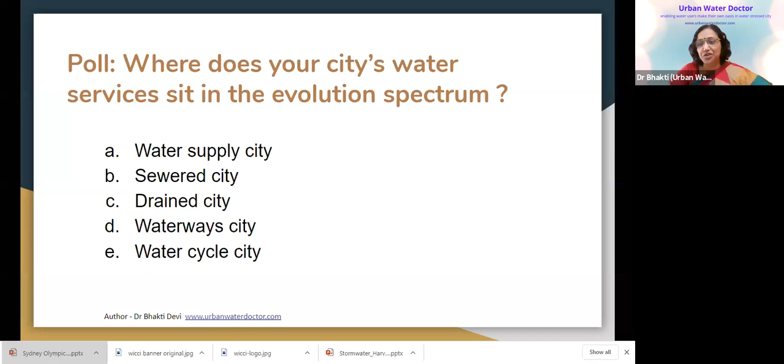Okay, so most of them don't have a sewage system with enough coverage. So water supply city, sewered city, great. So our aim is to get to a water sensitive city. That is our aim, and integrated urban water management can show us a different kind of way, which is more interesting than the traditional way we have been doing things. So that's why I want you to get the courage, don't lose heart, that we can easily go from water supply city to water sensitive city straight away. That's the beauty of integrated urban water management.

Okay, so now, as I said, we want to really understand why we need to integrate. And we'll do that by taking stock of the outcome of unintegrated urban water management. So of course, I want to take the example of our own cities in India. We will look at some facts and figures in order to understand the outcome. So before I share one of the figures, can you guess,

Is there a poll ready, Dipankar? Have you got a poll for this question? Dipankar, are you there? Yes, madam, it is ready. You have a poll for this? Yeah, maybe put it out.

So I'm asking you to guess what percentage of our country's population is currently under extremely high to high water stress. Water stress in simple terms means your water demand is much higher than the water you have available. So there's a big imbalance between what you need and what you have. So please, just guess an answer, and then I'll reveal the answer. You will remember better when you have guessed it and got it right or wrong.

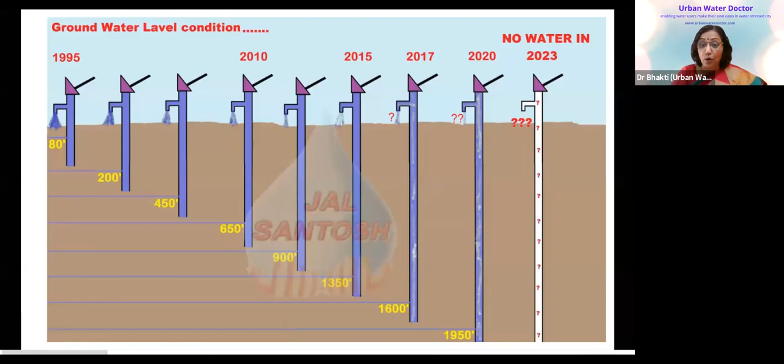So this is the situation of groundwater. Groundwater is getting emptied because we are only taking water out and not putting anything in. Okay, then the next thing, now let us look at what is happening with the sewerage system.

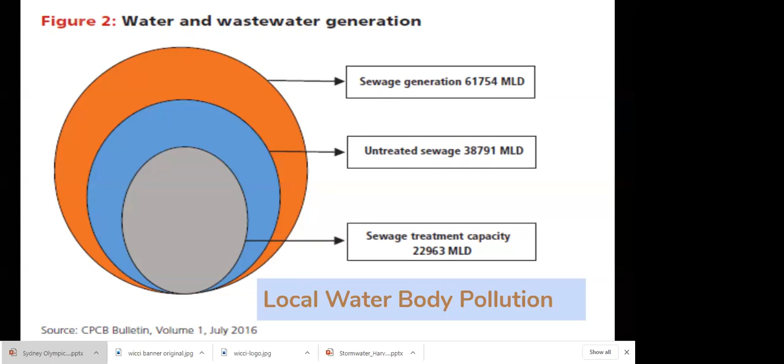As many of you yourselves can hear, this is very disturbing actually. I don't know why, even with the mute, it is making noise.

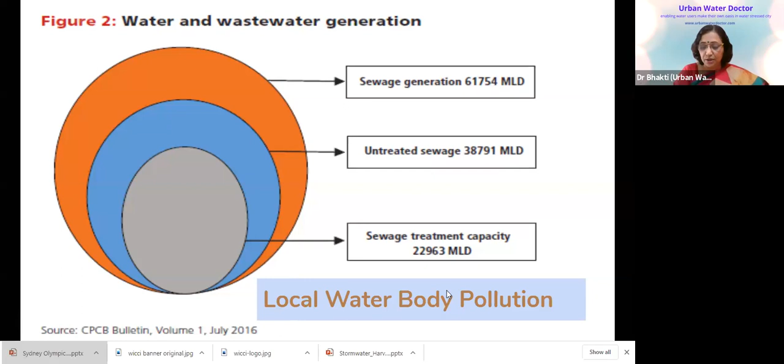Okay, so the sewage system, we find that a lot of the capacity required for treatment is much higher than what we actually have. And when you have less capacity to treat sewage, that results in local water body pollution because you're going to discharge untreated sewage into the local water body. This is what happened in Bangalore, that the lakes have become a dumping ground for untreated sewage as well as solid waste.

So everything is stacked up, and that is what is making the water crisis. We are continuously drawing water in a linear way and finishing it. It's like drawing money from the bank over 100 years and it's emptied now, while the population has grown, and on top of that, whatever water you have is also polluted.

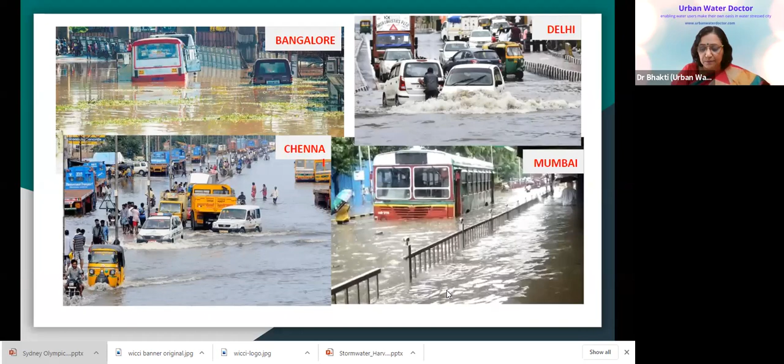And of course, more and more city means more and more hard surfaces, so you are bound to get all the storm water in the form of floods. And this is what you see in every city. It's a normal and common situation. So what I'm showing you is the outcome, the result of how we have planned and built so far.

So what does it tell? That all the water that we are throwing away, they count it as utilizable water. That means you can easily decontaminate and use it as water. It may not be fresh water, but it is still utilizable because we now have technology to treat the water to our required quality.

Because we have not been doing that, we have been extracting, using and dumping, extracting, using and dumping. What that does is it finishes off the water resource and increases the polluted water. So that is the result.

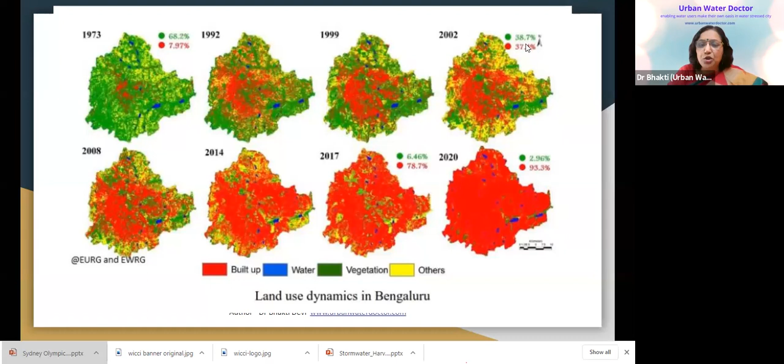Now, how does that connect with water? What does that have to do with water? Just put it in your chat box. Why am I showing the tree cover statistics when we're talking about water? Is there a relation between trees and water? And if so, what is that relationship?

Yeah, some of you have said erosion, water holding capacity. Yes. So basically, trees are like the lungs or the lifelines, which actually allow the water to seep into the ground and recharge the ground. But as the city gets built and built, the chances become less, and the trees are your only chance through which the water can seep into the ground, and even that has been killed off.

Then there were a lot of lakes, 1,000 lakes were there in Bangalore. I'm using Bangalore as an example only because Bangalore is right now in front of the queue where the water has died. And every city is in the queue. The story is going to repeat in every single city around the world, by the way. Every city in the world is on the exact same system, which is not at all sustainable. Bangalore and Chennai happen to be in front of the queue, and let us learn from Bangalore. That is why I'm showing the Bangalore example.

So trees have been killed. Lakes used to be the place where the water was getting stored and recharged. The lakes would also act as a recharge for the groundwater. Lakes have been built over, big stadiums have been built, depots have been built, IT parks have been built over them. So it is all sealed. So basically we have sealed the ground for so-called development, whereas we have sealed our own future at the same time. Because without water, there can't be any future, whether it's business or living.

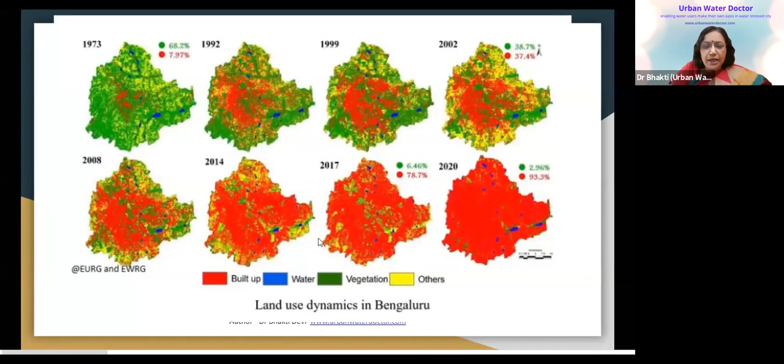But what did we do? Not only did we draw the water continuously without putting anything back, on top of that, the catchment through which water actually gets recharged by nature has been deforested. So from everywhere, it is like we are committing suicide, knowingly or unknowingly, doesn't matter. It is a complete suicide. You've sealed the cities, you've sealed the catchment by taking out the trees. You have no hope left for any water from anywhere.

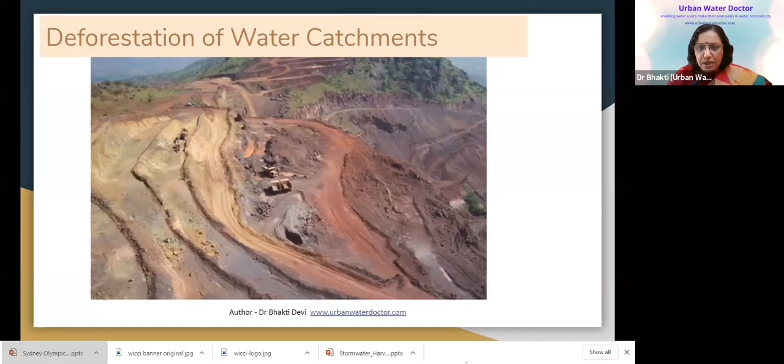So basically these are the outcomes. This is all about the various outcomes that you can see. Then there are some outcomes in terms of how we currently use water, whether it is industries, domestic use, offices or commercial properties. Let us try and see what the current situation is with how we are using water. So I have a quiz here. Dipankar, if the quiz is ready, you can put it out.

So I would like you to answer that industries in our country, and these are not my figures, this is what I've taken from the Ministry of Environment, which has published this, National Water Mission. So industries in our country use what times more water per unit of production compared to other countries? So where do you think we sit, compared to other countries, in terms of our water use in industries? Take a guess and see what your answer is.

I would like to see what you think it is, and then I will share what the correct answer is. So again, you don't need much time, another 10 seconds and we can close the poll. So all of you please pick one answer and reply. So we're talking about water use within industries. How smart or how unsmart is it, how much are we using compared to other things?

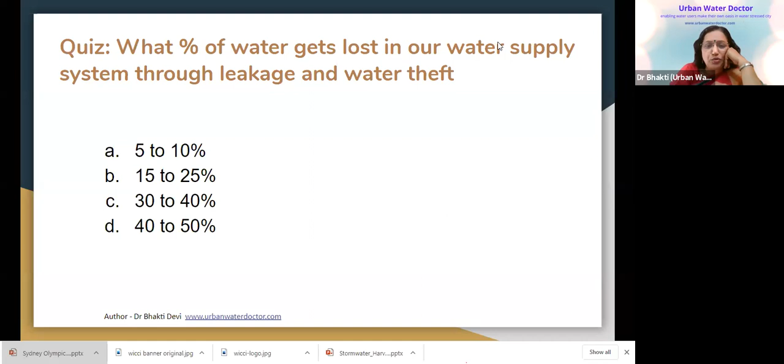So again, just pick an answer and all the answers will be revealed together. Because we are talking about how we tend to lose or waste water. Water we already have also needs to be conserved and saved because we are not having enough water. So it is important to understand how much we are wasting so that we know how much can be saved. Okay, what's the answer? 15 to 25 is what most people have replied. Okay, we'll see.

Next, last question. Now I'm talking about our own household or within offices. What is the water saving potential? That means how much percentage of water can we save by making simple, low cost hardware changes and no cost behavior changes, because the current water use seems to be such that there is potential to improve our usage. That means we can use less and save more. So what percentage could be the saving potential inside the home and offices?

And remember all your answers so that when I reveal, you will see whether it is different or correct. Okay, we can close the poll. Again, many of you think it's 15 to 20. 32% feel it's 30 to 40. Okay, I'll reveal all the answers in one slide, because that's the facts. I got the figures from the National Water Mission.

Industrial plants in our country consume 2 to 3.5 times more water per unit of production. 2 to 3.5 times more. So what does that say? We have so much potential to save water and make our water use efficient in the industrial sector. So before you even start to get more water from the ground and another dam to be built, let us focus on taking back this water which is already there.

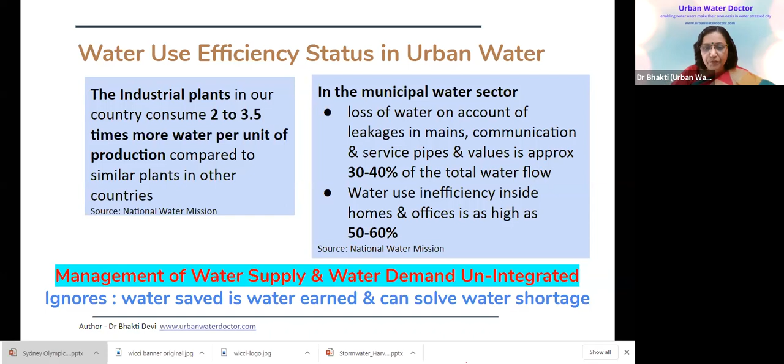So the current water system is what I call an extract, use, dump system. Just replace water with money. What do you think will happen? You'll become bankrupt. So we have become water-rupt. Our water bank has become bankrupt. And why? Because the population is continuously rising. It is not static. Even if the population was static, you need to have your catchments in good condition so water is getting recharged. But you're not paying attention to the catchment. So without recharging the natural system, you are continuously extracting, using and dumping that polluted water.

And then what happens? Until the water source is depleted, and water conflict or water war happens, because cities around the same water are growing, they're accessing the same water, now they don't have enough water and they start fights. And the reason is because the management of water, sewage and storm water is unintegrated.

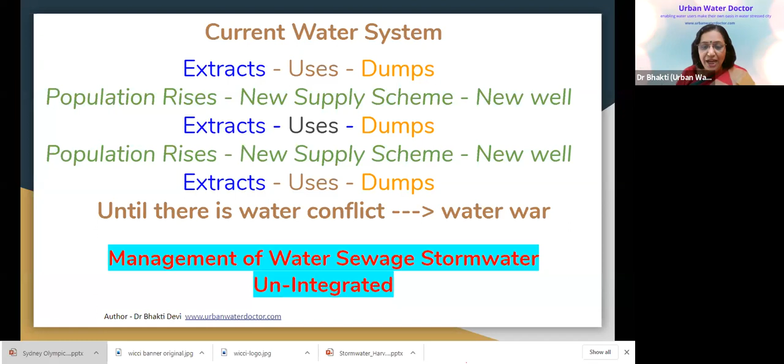If you were to quantify the rain that falls on a city, you'll find that it has enough water to supply. But we don't look at rainwater as a source. We look at it as something to be thrown away because it floods. Of course, there's a good reason for that, but we can also think about how we can look at it as a resource, and that is what integration means.

Same as we saw, tree cover and forest cover are lifelines for the water aquifers and rivers, yet we continue to mindlessly destroy them to make room for development, killing every chance of replenishing water. So not only are we ourselves not doing anything, we are not even giving nature a chance to replenish by removing the trees and forest cover. So why do we do that? Because catchment management and water management are not looked at together. Water management is a different department, forest a different department. They don't see the natural connection. Nature is interconnected, but we operate in silos, and that is the problem.

Now I've come to a point where I want to ask you. You've seen the types of things that have led to the water crisis. So my question is, Dipankar, if the poll is ready, please put it there. What would you consider the number one cause of the urban water crisis? I'm giving you four factors. Every factor contributes, of course. Which would you rate as the biggest cause of the urban water crisis?

And another way to look at it is, the cause that is controllable, that you can control, it is in your hands, because you are a water user or you are a water planner, anyone. And that's another thing. Water management is not just a job of the water company or water utility. There you go. Many of you do think it is.

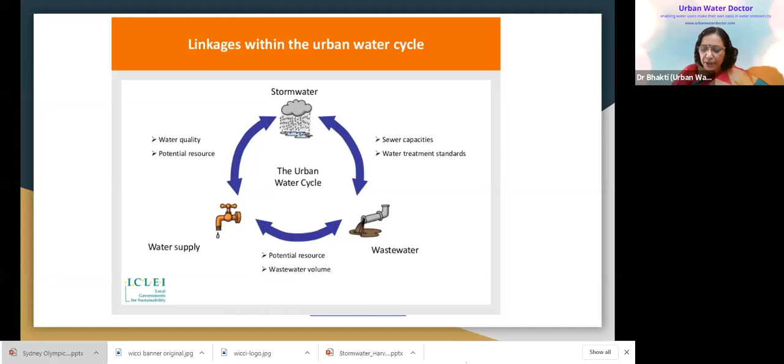And this is another way to look at it, because as I told, the whole idea of integration is looking at the water supply objective, the wastewater objective, stormwater as interconnected. It's all linked together. And how do you link them? If you look at it as a resource, then you will be able to integrate them. Integration of urban water management is also about integrating with other sectors in urban areas. For example, water cannot be moved without energy. It is closely linked with energy consumption. The more water you use, the more energy you're using.

Did you know Bangalore city brings water from a distance of about 150 kilometers, and on top of that, Bangalore is located on a height? It's like a hill station. So the Kaveri water has to be pumped up by almost 1 kilometer height and 150 kilometer distance. Imagine the energy it uses to move that much water. About 1200 million liters per day is moved every day. Out of that, 50% is lost in the system.

Now, can you take a guess? BWSSB is the Water Supply Board of Bangalore. What percentage of their total expense must be their electricity bill? Just put it on the chat. I should have put it on the poll, but just put it on the chat. What's your guess? What percentage of their expenses is made up of just paying the electricity bill to BESCOM? BESCOM is the energy provider.

Okay, let me see some answers. Okay, you got 30%, 40, 60, 70 to 80. I think that is the correct answer. 70 to 80% is simply electricity bill. So can you see how closely it is connected?

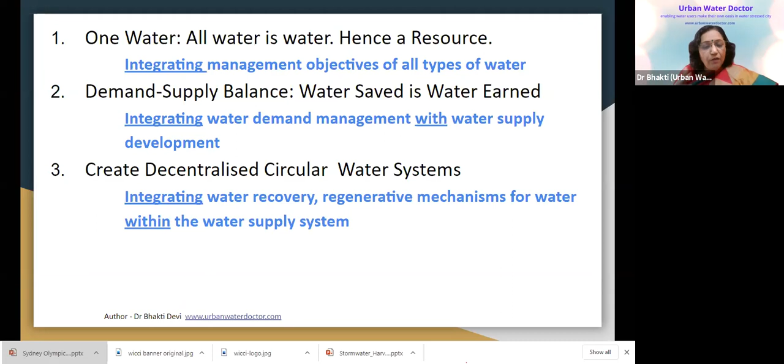The water supply system has to incorporate water recovery, simply because for 80% of our demand we need different qualities of water. We don't need one quality of water to be supplied. We can make non-potable quality water for things that are not for drinking.

Then the other thing is we have to integrate any urban forms, whether it's roads, whether it's buildings, any hard surfaces that we build in a city, so that we become water sensitive about it. We understand how it impacts the water cycle, and therefore how can I create a design in the building that will generate less, will retain the stormwater rather than throw it out, and will recycle it so it doesn't go out. So you have to become water sensitive, and that happens by integrating all three principles within the urban design and within the city infrastructure.

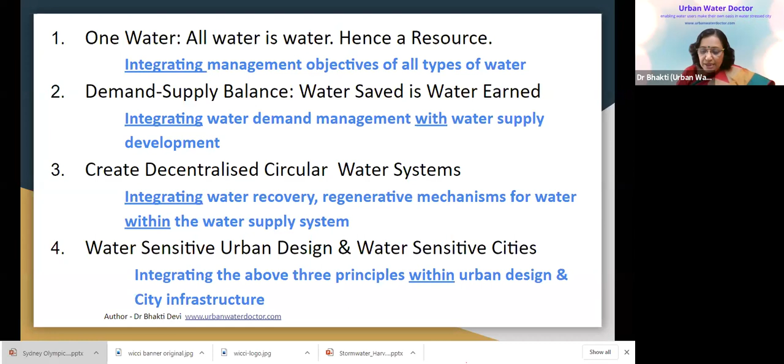So whether it's a road you're building, whether it's a dam, whatever you build in the urban system, you have to make sure you are following the three principles: water demand and supply balance, and create a decentralized circular water system. So again, these are abstract concepts. So what does it look like if we did it in reality?

So that is why I want to take the examples in Australia, where I have been personally involved in each of the projects, so I have picked those projects. It starts with my own journey in Australia with my water career. So I'm going to show 4 of them. Each of them highlights one of the principles, and it will have certain aspects of all the other principles. So the first one I want to talk about is the Sydney Olympic Park, and it has a system called the Water Reclamation and Management Scheme.

So I'll give you the 4 things. And before I start each case study, please listen to it carefully, because it's almost like a quiz. After each case study, there'll be 2-3 questions asked as a quiz or as a poll. So you'll know whether you were listening to the presentation carefully. So please pay attention to the presentation on the case study.

I just want to check the time. How are we going? Oh, it's almost half an hour left now. Correct, it's half an hour left, no?

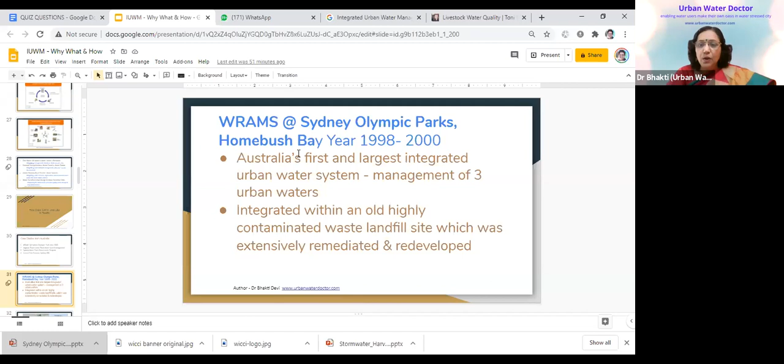Okay, so we start with the Olympic Park presentation. Sydney hosted the Olympics in 2000. And they did a very smart thing, because they knew they had to build a lot of infrastructure for the sporting stadiums, as anyone would when you host an Olympics. So they did two smart things. One is they picked the most contaminated land in Sydney, because Sydney has a history of British colonies using some of the places. This particular site was very contaminated, because it used to have the state abattoir.

They were making meat for many years in that place, and an abattoir produces a lot of toxic contaminants across the entire land. On top of that, it was being treated as a waste dump for a long time until 1990. So they had stopped using it as a landfill, but it had become completely polluted. So they thought, let us use this opportunity to completely change and clean up this site. And that's what they did.

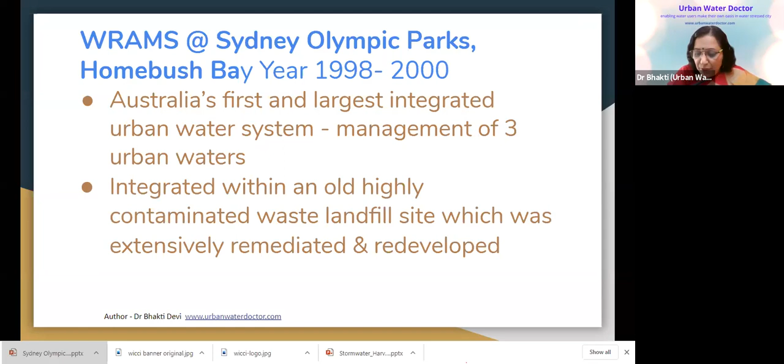So what's the context? There was a 640 hectare site. They decided they will build all the required stadiums and parks for all the Olympic activities, which after the Olympics can be used for multiple purposes: holding events, entertainment centers, offices. So they designed it in a way that after the Olympics is over, those very stadiums can also be used for other purposes. So it has a 640 hectare site.

Two thirds of that area was turned into beautiful parklands. Then major sports and stadium facilities, residential complexes and commercial office spaces were built, and whatever was required for the Olympics was done, and they also made enough infrastructure for the future. So this is the context, and in that we have the system called WRAMS, or Water Reclamation and Management Scheme, which I'll talk about.

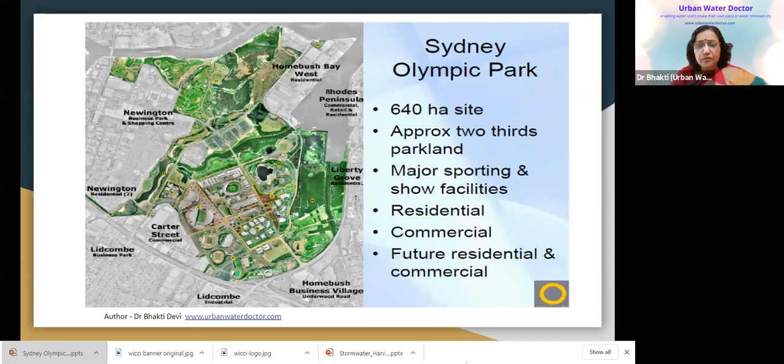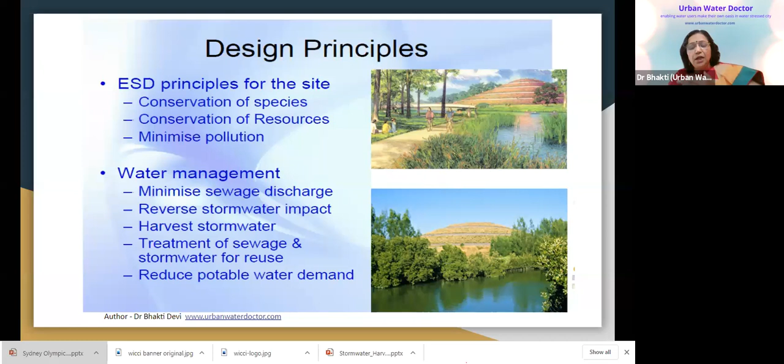So the design principle was, because it was integrated urban water management, whatever we build must minimize sewage discharge, must reverse the stormwater impact, must harvest stormwater, treat it, reduce potable water demand, and reduce the need for using fresh water. Okay, so that was the principle.

This diagram is not very clear, but I want you to focus on the fact that for all the facilities, number one is the brown color. All the sewage generated from the facilities is treated in a water reclamation plant, and whatever is produced there is diverted to the water treatment plant. Then the stormwater from all the facilities is diverted to a stormwater treatment pond, and then stored in a brick pit.

It was also a site where they used to have a brick making facility, and there was a big brick pit there, so they used it to store the treated stormwater. Then the treated sewage and treated stormwater are treated in the water treatment plant to produce all the recycled water, number 5, needed for the facilities and future facilities. So this is, in short, the entire WRAMS system.

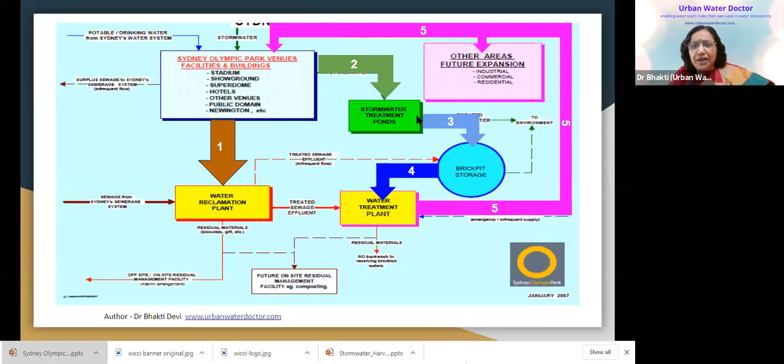So sewage is being treated and reused, and stormwater is being treated and reused. They have a water reclamation STP, made up of a sequential batch reactor, with biological nutrient removal and disinfection. Then for the stormwater, they use the brick pit for storage, and then there's treatment with wetlands. That is the stormwater part.

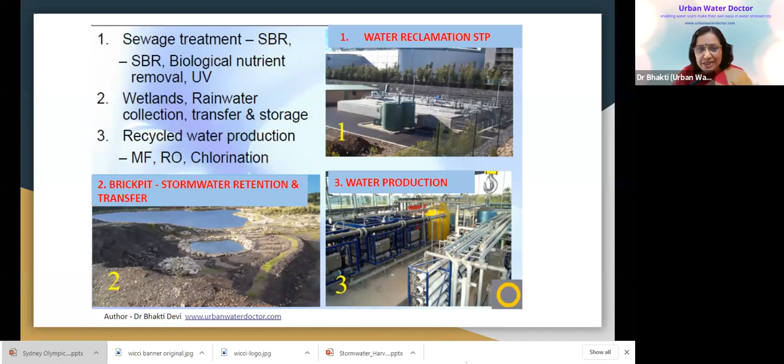And number 3 is the recycled water production, where they do advanced treatment using microfiltration, reverse osmosis, and chlorination. So these are the facilities, and this is how it looks. They made it in glass so that people can come and look at it, because it was also for demonstration purposes. So they turned it into a beautiful space for people to visit the plant.

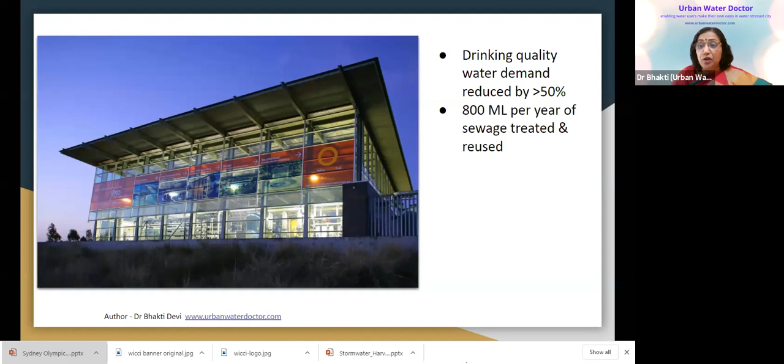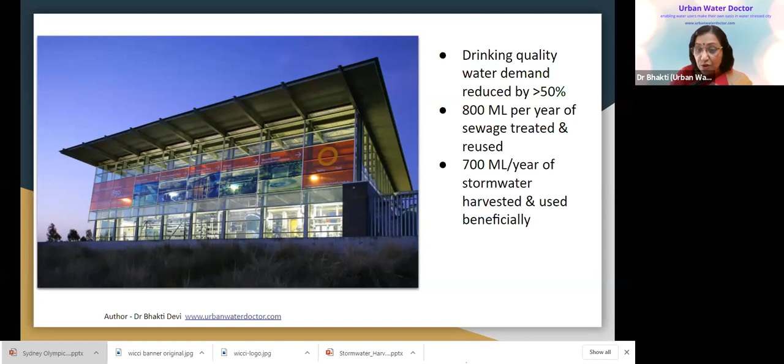So what does it achieve? Drinking quality water demand has reduced by more than 50%, so a very small percentage of demand requires drinking quality water. 800 million liters per year of sewage is treated and reused. 700 million liters of stormwater is harvested and used beneficially. They created a lot of wetlands out of the treated stormwater, which attracted a lot of biodiversity, so it has become a beautiful biodiverse area.

And 850 million liters of recycled water is supplied every year to 15,000, now probably 20,000, customers. So that is the population this system is servicing. As you can see, it's a small system. This is called a decentralized system.

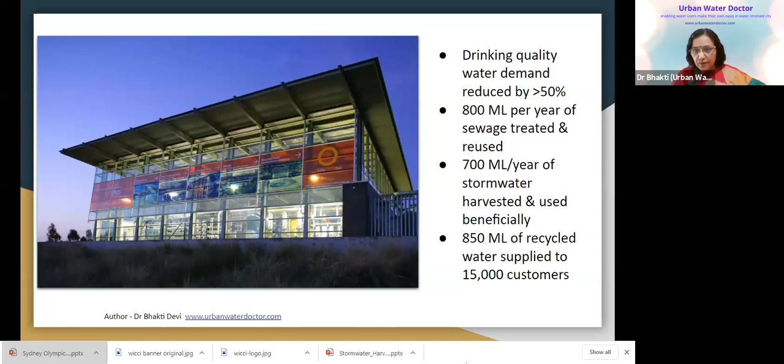So what kind of water are they using the recycled water for? Toilet flushing, car washing, any wash downs, irrigation of parks, residential gardens, playing fields, clothes washing, even washing machines. It has a separate pipe supplying you the non-drinking water, but clean enough to not soil your clothes. Firefighting, fountains, cooling towers in the offices, construction purposes, because new buildings will be coming up, so they're using it

for that. Swimming pool filters, backwashing, so these are the variety of uses. Normally, in the traditional way, we would be supplying drinking quality water for all of that, but when you start looking at sewage and stormwater as a resource, you can start to supply this.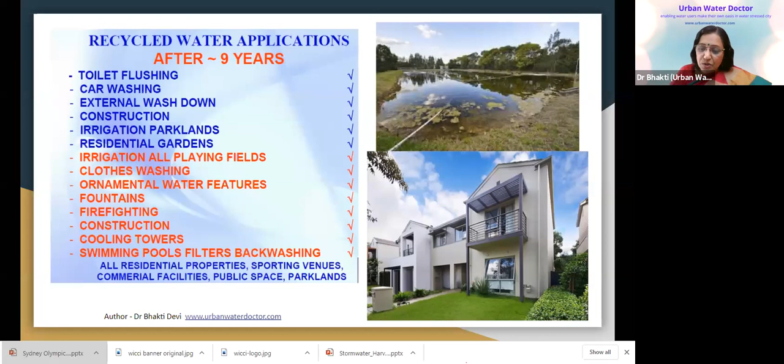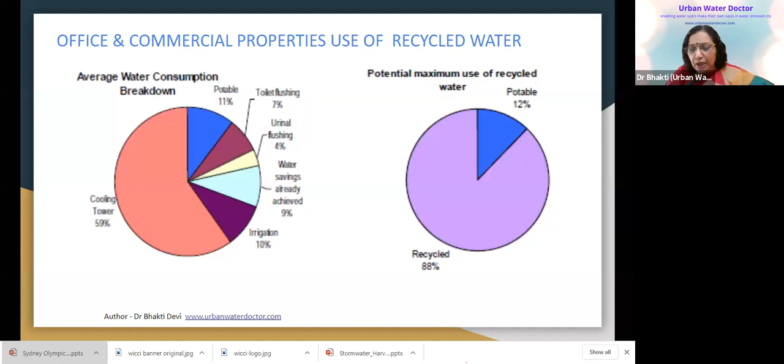So just to give an example, in a typical office building, almost 88% of the entire demand for irrigation, cooling tower, all this would be replaced by recycled water. So you only need 12% of water required for drinking quality. So that is the impact you can see this system has made.

Then I wanted to give an example of a multifunctional infrastructure. So for example, this brick pit, I told you, stores the treated stormwater before it is pumped to the treatment plant. And of course, it always has more water than is needed every day. So that was used to also enhance the population of the green and golden bell frogs, an endangered population.

So they used it for biodiversity purposes, and then they created this deck so people can walk around it without disturbing the biodiversity. So they made a beautiful walkway on top of the brick pit.

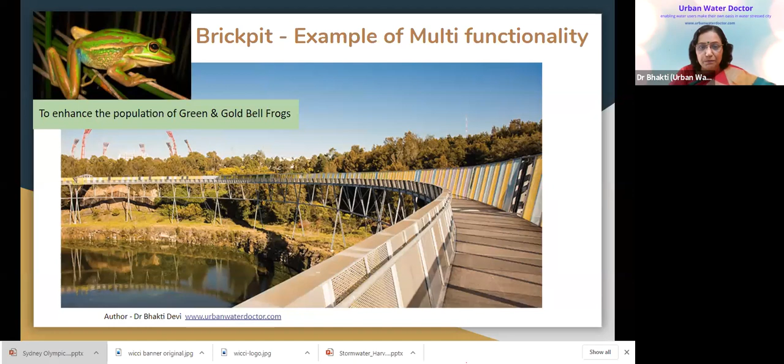So what I'm saying is that with any infrastructure, it has to be thought about how you can use it for environmental purposes, for social purposes, for the purpose of water creation, but excess water can be used for environmental purposes. So that is also okay. So that is a very good example of a multifunctional infrastructure. It's become a beautiful recreation spot now for people to come and enjoy the biodiversity.

Okay, now quiz time for the Sydney Olympic Park water reclamation systems case study I presented. So the first question, Dipankar, would you like to put the question? Okay, so what's the approximate size of the development? I think we don't need a long time. We just close the poll quickly so that we can move ahead. Okay, so let's see. Yes, good. So 61% of people are paying attention to that number. So 600 is the correct answer, 640 hectares to be precise. It's just for fun.

Then the next question, 1 minute. What percentage of total development area is allocated to parklands? Is it 1/3, 1/4, 1/2, or 2/3? Okay, so again, 2/3 is actually the correct answer. Some of you got it right. 1/3 of people got the 2/3 answer right. So that's fine. Okay, so one more question. I think there may be two more questions. Yeah, two more questions to go on this case study.

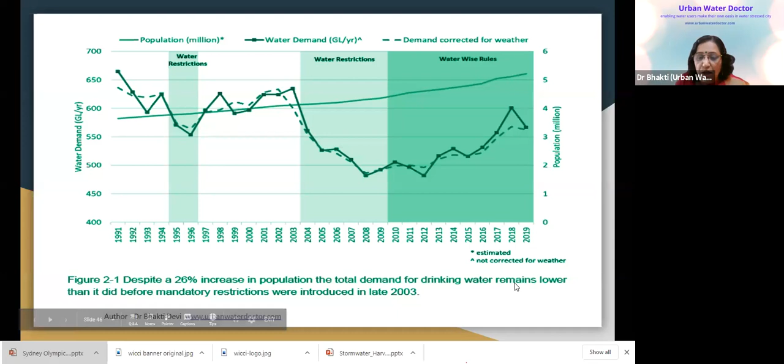Okay, so now I just wanted to show that they did two things. Fixing leaks: they almost save 44 billion liters a year going forward. This is the projection that they are continuing to invest in leakage management, and they'll save this much a year. So even if the population increases, the water demand is kept under control.

And they made a profit of $450 million in spite of spending nearly $60 to $90 million every year. And going forward, they are making a $1 billion investment over 10 years. That means 100 million per year investment to manage the leakage, and also to help people save water in their houses.

So what is the program they have? They announced this, called the WaterFix program. They say, call us on this number, we will come and fix your leaks for free. We will change your shower head for free. We will change your taps for free, and we will repair the toilet leaks.

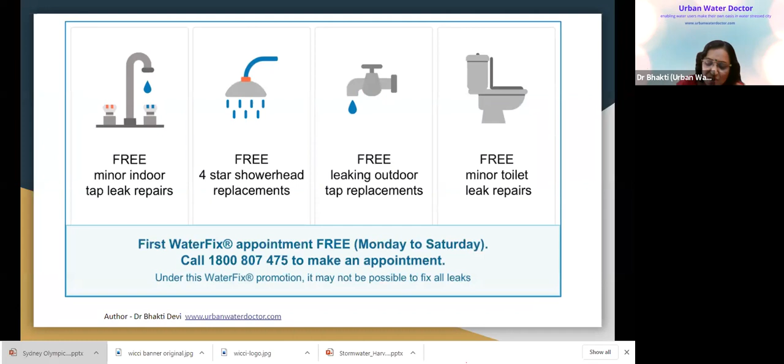Because they know that they're going to make money by helping customers save water. So this WaterFix program is very popular. It is advertised heavily so that there's no excuse for householders to not take this help.

And then they published best practice guidelines for water conservation in hotels and water conservation in offices, and they're all available in the public domain. So if you are in an office building, go and pick up this guideline, because these guidelines tell you what you can do on your own. You don't need anyone's help. They're all low-cost solutions.

Before you even start building rainwater harvesting, you have to first do this, because this is going to save you more water than rainwater can. Save this, then add rainwater harvesting on top of that. Add grey water recycling on top of that. And that way you build your water bank. And then suddenly you'll find, I don't need any water from the outside. I'm doing fine.

So in fact, in Bangalore, the model that I've developed, called the water scorecard model, helps the buildings reduce 50 to 100% of the water that they are importing or using unsustainably. But out of the 50 to 100% saving, 50% is inside the house, small changes. Only later on will you get more savings.

If you're not doing the household savings, you'll get 10% saving by doing rainwater harvesting. But that is not enough. You have to do inside saving. Inside actions are very important. So the next quiz is about this, if you're paying attention. So Dipankar, can we have the next two questions?

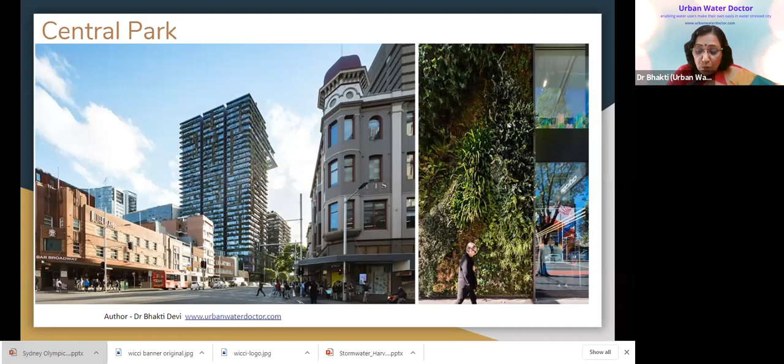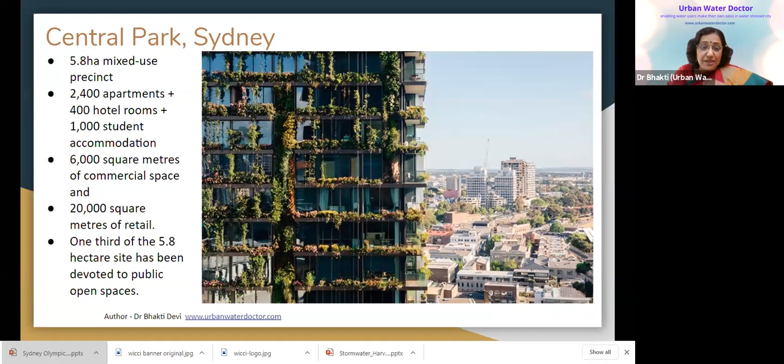So Central Park is about a 6 hectare mixed use precinct. Precinct means like a neighborhood or a layout. 2,400 apartments, so you can take about 3 people in every apartment. So that's around 7,200, 8,000 to 10,000. But of course, there's also floating population: 400 hotel rooms, 1,000 student accommodations because there's a university nearby, 6,000 square meters of commercial space, 20,000 square meters of retail space. 1/3 of that space is allocated to open public green space. So this is how the green spaces are accommodated around the building.

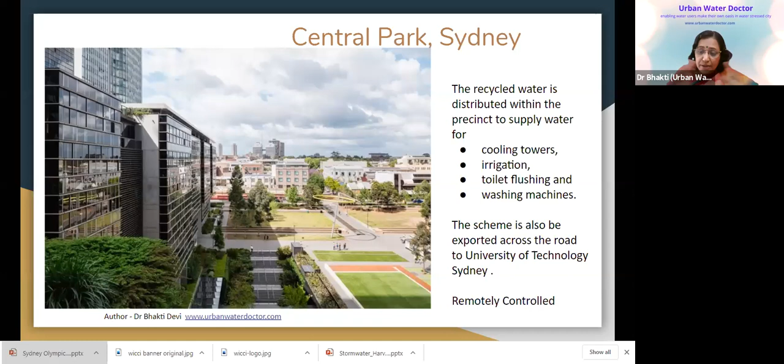Then the recycled water, since we're talking about water in this place, is distributed within the precinct to supply cooling towers, similar to Sydney Olympic Park. So wherever they could, they've replaced it with recycled water: irrigation, toilet flushing, and washing machines. The scheme is also exported across the road to the university, so even the university makes use of it in their cooling towers and toilet flushing. They have surplus water. The entire plant is remotely controlled. It's a compact plant in the basement. It produces no noise, no odor. So this is what it looks like at night time.

So wastewater is collected from the buildings. And also there is a practice in Australia called sewer mining. Sewer mining means, because the sewage system already runs in that area since it's an existing city, they take sewage from it, treat it, and turn it into usable water. Because sometimes when you have a recycling system, you can have less water being generated because you're efficient, but you need a bit more water. So they're taking water from the sewage system, mining it. They're calling it sewer mining, and that makes up the shortage in the volume. And they treat it and use it.

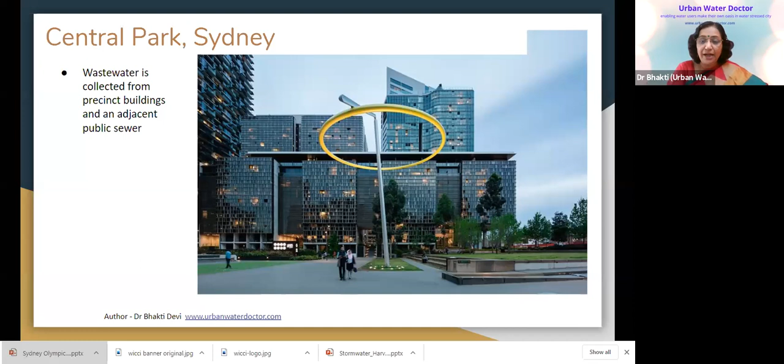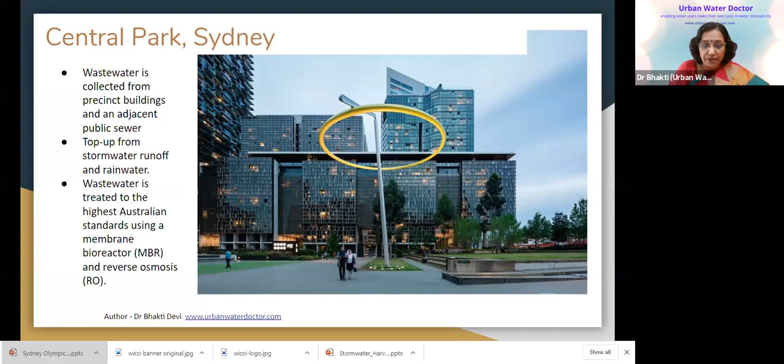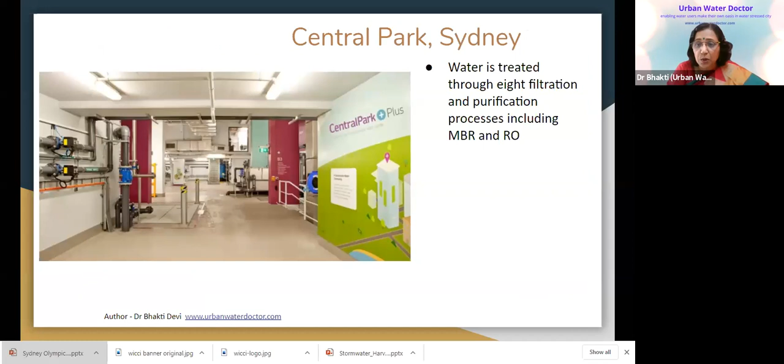Top up from stormwater runoff and rainwater. And wastewater is treated to the highest quality using membrane bioreactor and RO. This is how the plant looks in the basement, clean. Its water is treated through 8 filtration and purification processes, including MBR and RO. And it requires minimal space, doesn't generate noise, no smell, and it's easy to accommodate in a high density building.

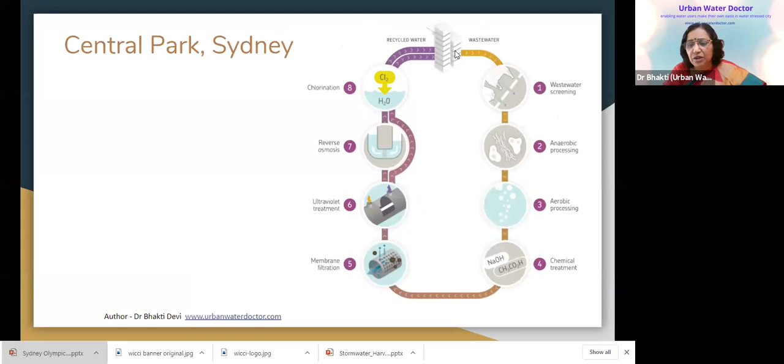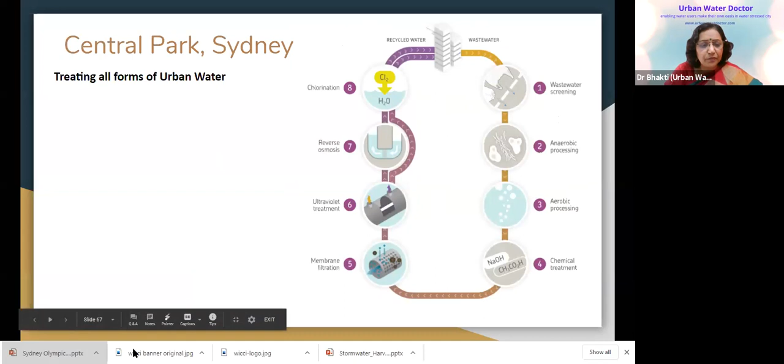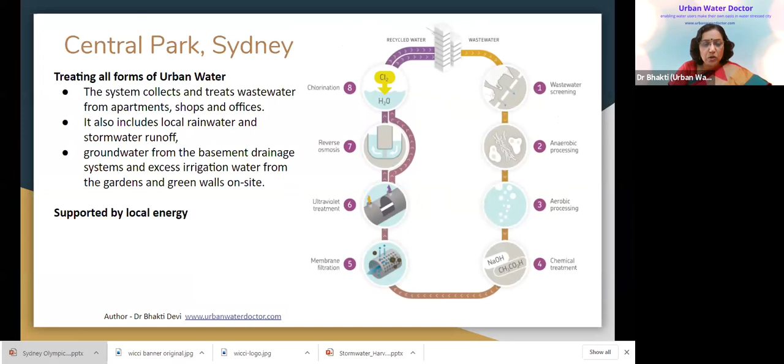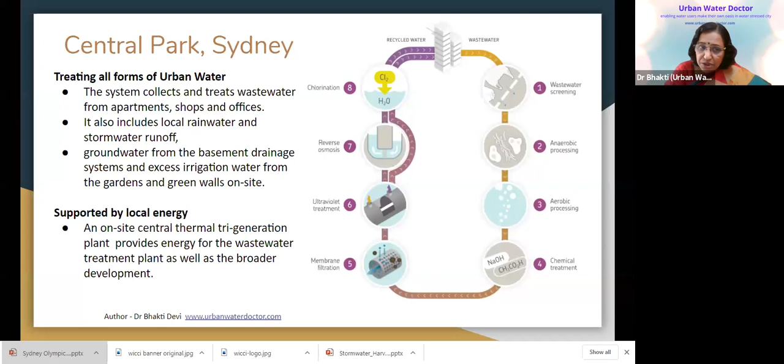And this is the sequence it takes you through. You can have a look at that. So it's treating all forms of water. It's used for treating the wastewater, sewage, and the stormwater. It also collects rainwater as well. And it's supported by local energy. They also produce energy in this building using a tri-generation system, and that energy is supplied for running the plant.

So the quiz, just 2 questions in this. Oops. You want to put it there? I don't have it on my slide. Deepankar, if you have it.